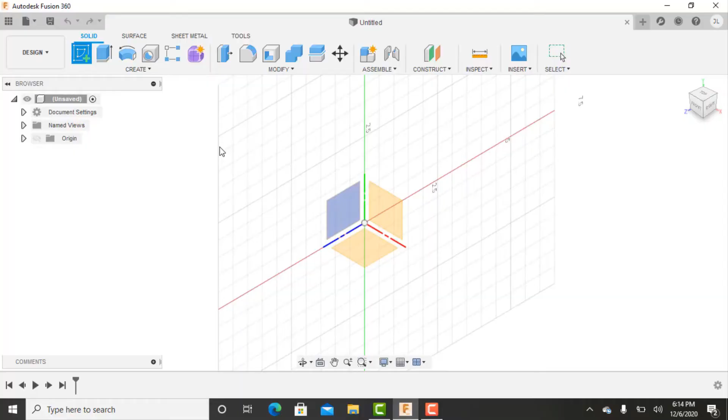In the CAD side of Fusion 360, we're going to start by making a sketch. We make a sketch, we select a plane, and then we can sketch a rectangle. We can then push D for dimension and throw some dimensions for where we think we want to be.

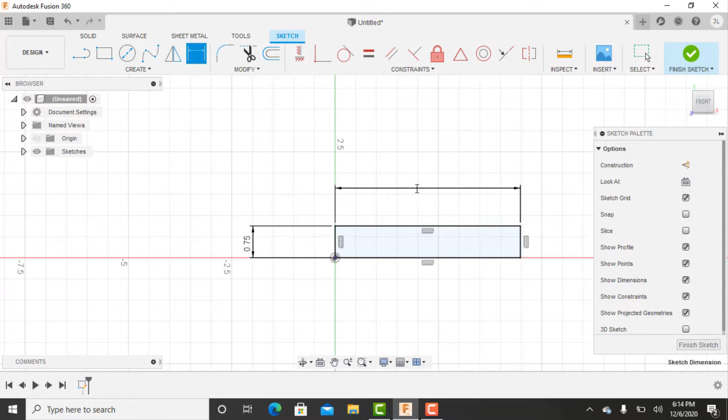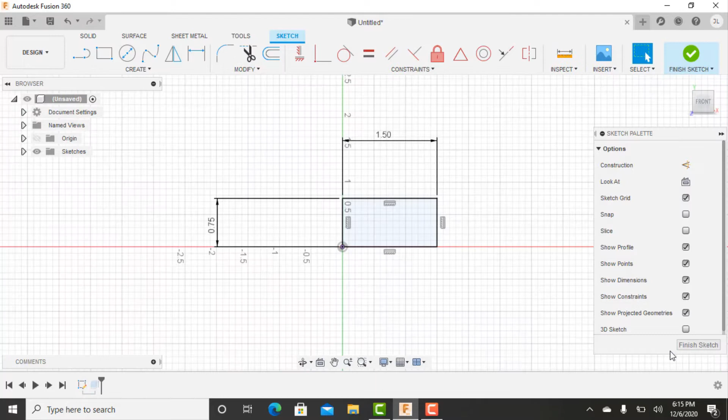The real value in CAD software is being able to get a very good visual. So no longer do we have to pull these numbers out of thin air without having any good representation of what they look like. We're able to put them on the screen and get a good visual for how they're going to work together. So after I had that sketch made, I pushed E for extrude, and then within the extrude feature, we're able to make that sketch three-dimensional. We gave it a dimension of 1/4 inch, and now we have a body.

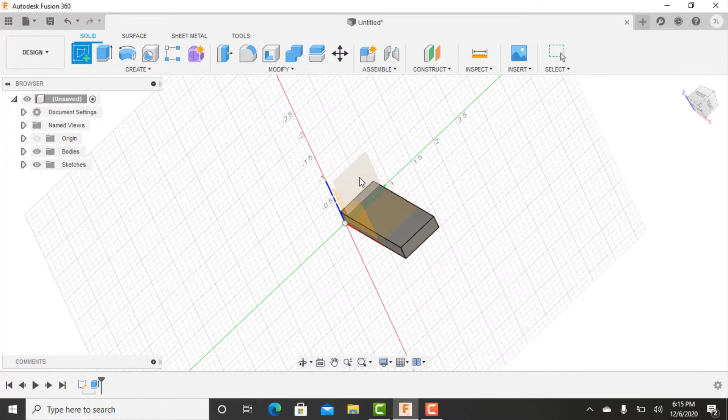So from there, we can add another sketch. We select a plane. We can select any of the construction planes, or we can select a surface on the model that we already have. So we can select this top surface and then draw another rectangle. E again for extrude, and then we can give this some three-dimensional geometry as well.

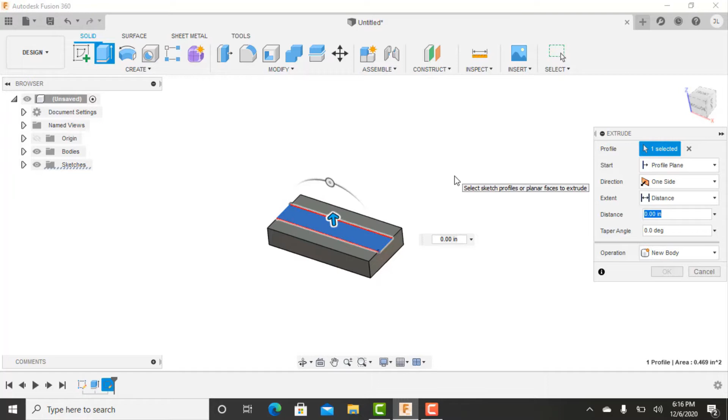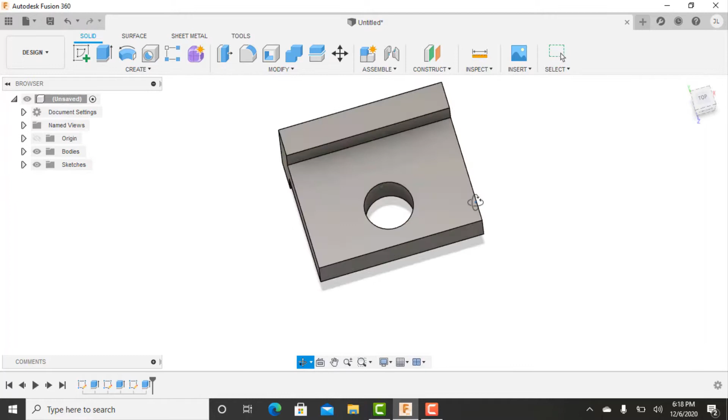So from there, we can create another sketch and create the hole we need. So we'll start by making a circle. Within extrude, we can either add to the model that we already have, or we can intersect the model and it will cut the body. So now we have a hole. Let's make that an 1/8 inch, and then we'll use a 1/4 inch end mill. So when we use it, it makes the radius that we're looking for. So we can also round these corners to make it look good.

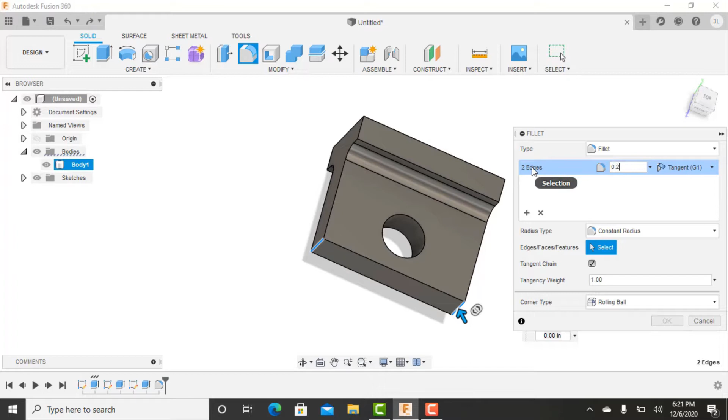There is the option to be able to add a fillet within Fusion, but I typically don't do that on the modeling side, and it makes life a little bit easier on the CAM side. There's a lot of different ways that we could go about making this. You could attack it from the top and then flip it over and attack it from this side. You can make it this way. So you're talking about having the raw material clamped in the machine and how you're going to machine it out.

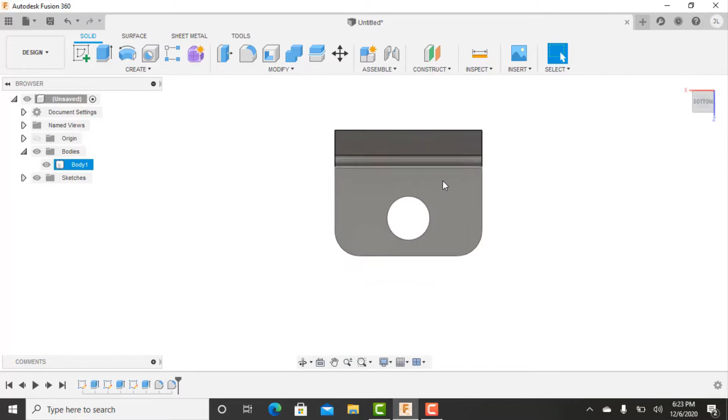Yes. So starting to think about more of the programming side now. Exactly how we're going to op this part out would be how it's referred to. What operations we're going to do first and how we're going to do them. From this top side, we can only reach so many features with a 3-axis machine. One option would be to machine this top face and then flip it over and machine this.

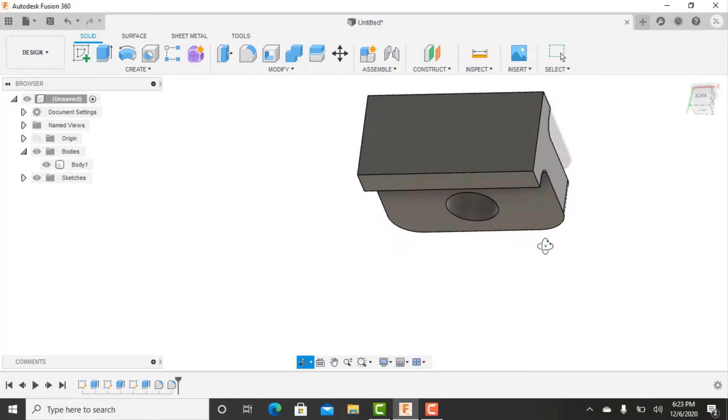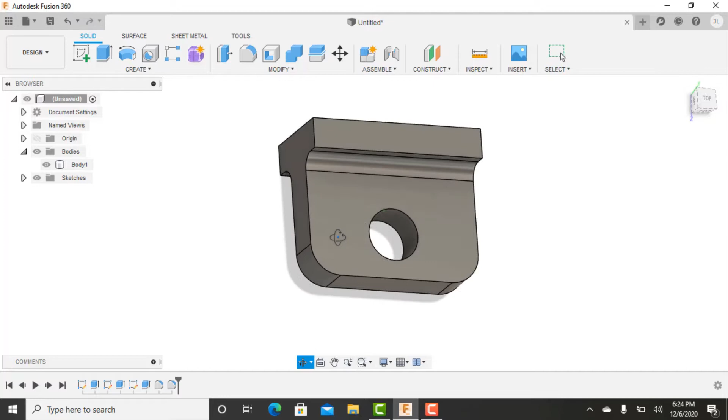Another option might be to machine this as the top of it at first, flip it over. You would have to clean off what's left in the bottom where you were holding it in a vise, and then set it on its side to drill a hole in it. There's a lot of different ways you could go about it. We'll probably be better off to do it this direction, where we'll machine as many features as we can from this top side, and then we'll flip it over and finish it up. And that way we're getting it done in 2 operations.

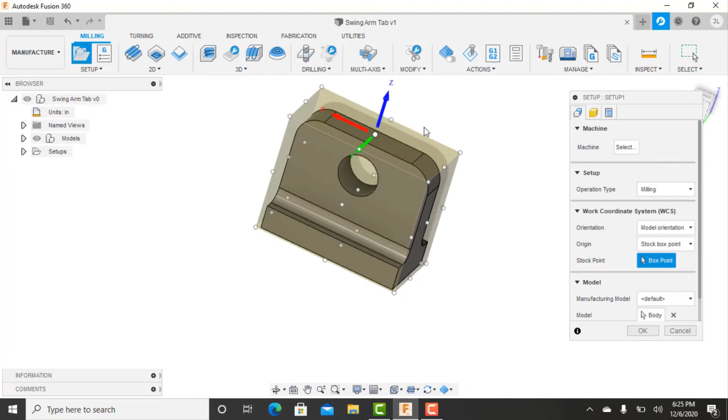We can jump over to Manufacture, which is what Fusion calls their CAM space. On the Manufacture side, the first thing we're going to do is create a setup. So we do so here. Here's where we're going to tell it the work coordinate system. So essentially tell it where the machine is referencing 0 from, and then what orientation we're going to set up this part. The default is model orientation, but that is not the way we want to do it. So we're going to select a Z and an X axis.

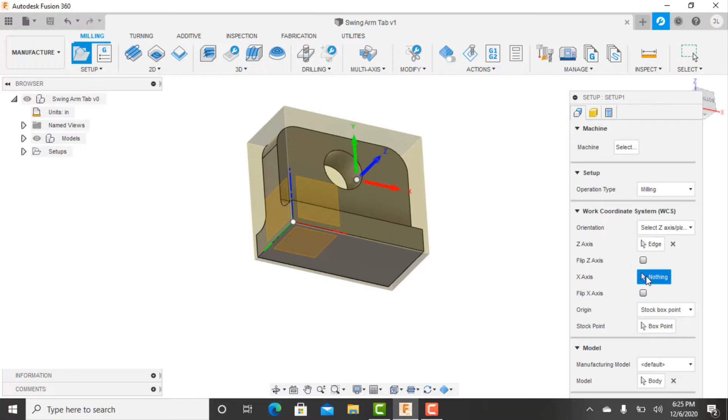So we can select any line on the part that would represent the Z, and then machine it this way. So we'll machine that. We'll set that as the x-axis, and then we can flip it to where it's where we want.

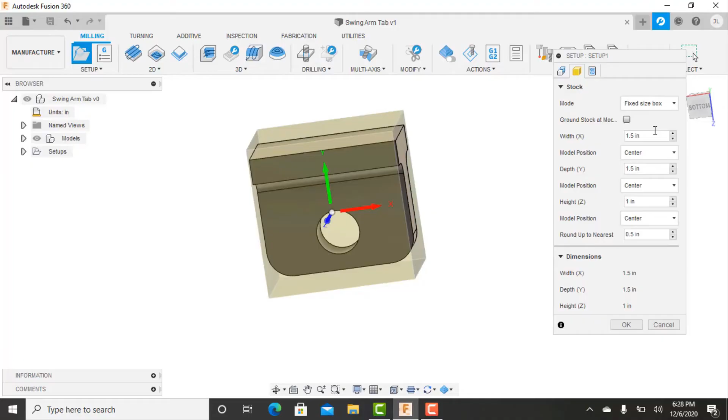And the next tab of the setup is where we can establish the stock size. So default is a relative size box. We'll start with a fixed size box. We'll just go ahead and cut this one time. So we'll make it 2.88 inches in the X direction. And then we can go ahead and cut it at 1.5 inches in the Y.

99% of the time, you want to try to orient your part to where the longer dimension of the stock is in the X-axis, so that way when you clamp against it, you have less material to bow. So if I was putting this whole chunk in a vise, I would want to program it to where I'm holding it like so, right. Just because holding it like this is going to give more room to bow.

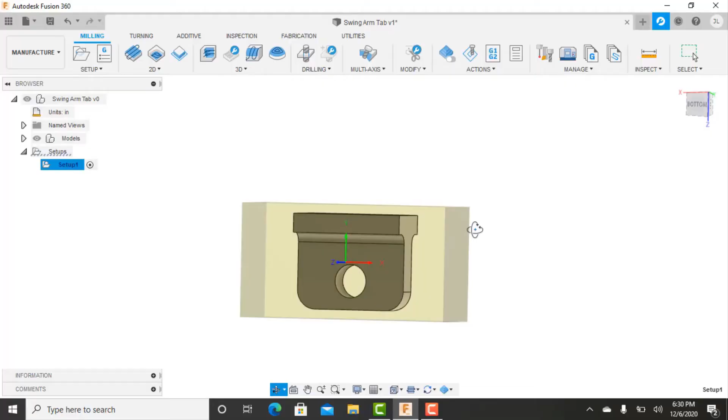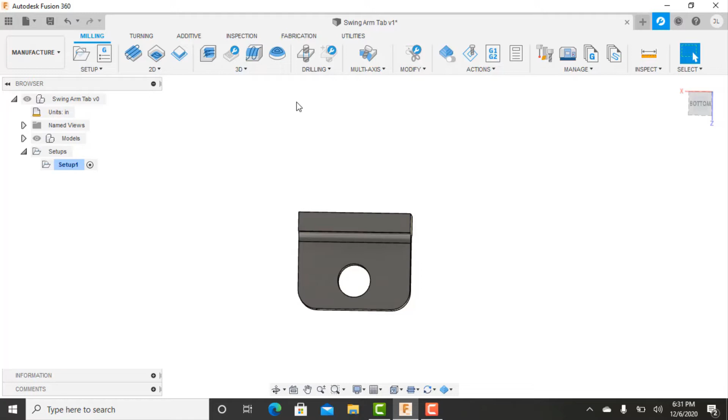Okay. So we need to start out with a roughing operation. Fusion 360 calls these adaptives. Here in our different toolpath options, we have 2D toolpaths and 3D toolpaths. A 2D toolpath is essentially Z coming to a position and then X and Y moving around in whatever shape it needs to contour your part. Whereas a 3D toolpath is for all three axes moving at the same time.

So we'll use 3D adaptive clearing, select that end mill, and then since we're working in aluminum, speeds and feeds are pretty forgiving. You have a lot of options for how you can input this. So we can just call it 8,000 RPM. In aluminum, your surface speed is really forgiving. Your feed per tooth or your feed rate needs to be reasonable. I can tell you with a lot of confidence that if we rough this part out at 4 thou per tooth, we're going to be doing just fine.

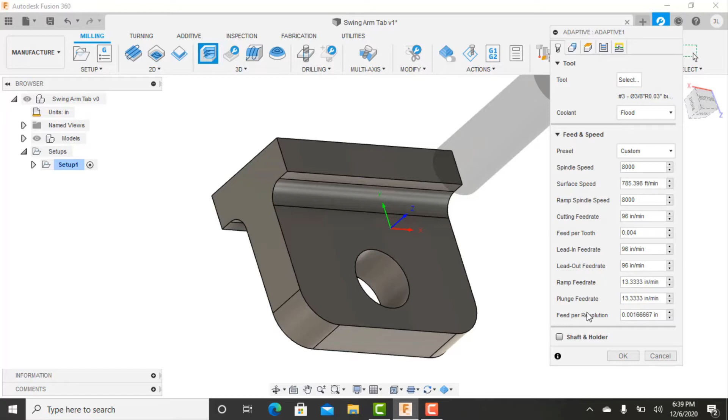Lead in, lead out, that's just coming into the cut, coming out. And then ramp and plunge are only really critical if you're actually cutting in the plunge or if you're going to be ramping into the material. So that would be like if you had a pocket and you need to get down in there. 3D adaptive is going to essentially look at your entire part. You can give it different boundaries. I don't think we need to right here. We should just be able to tell it stock contours, and then we'll set some heights on our height tab.

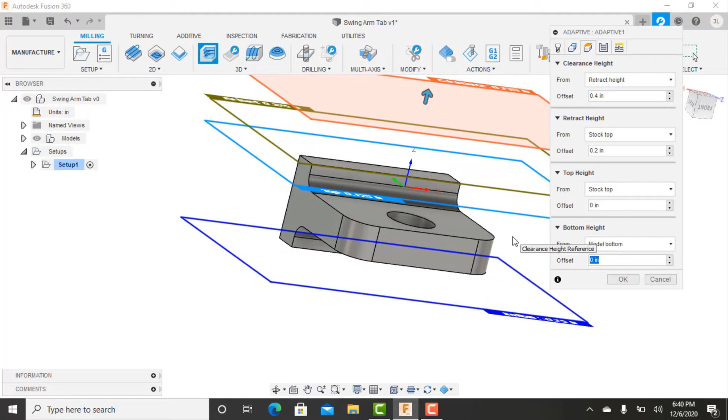Because we're roughing, we want to be able to come down and finish those walls. We want to drop our bottom height down below that. So we'll go 40 thousandths below for our roughing tool. Our optimal load here is very important. An adaptive strategy creates a toolpath to clear out an area and attempts to keep a constant radial load. General rule of thumb in aluminum, anywhere between 10% and 40% of your tool diameter is going to be pretty good. So we're using a 3/8 inch end mill.

So the maximum roughing step down is how much length of cut it's going to take in any given pass. We have a 1 inch length of cut end mill that we're doing this with, so we can go much larger than the 390 it was originally given. And then this fine step down is going to be how finely it increments. That'll be more clear once the toolpath generates. And I'm going to set that at 10 thousandths.

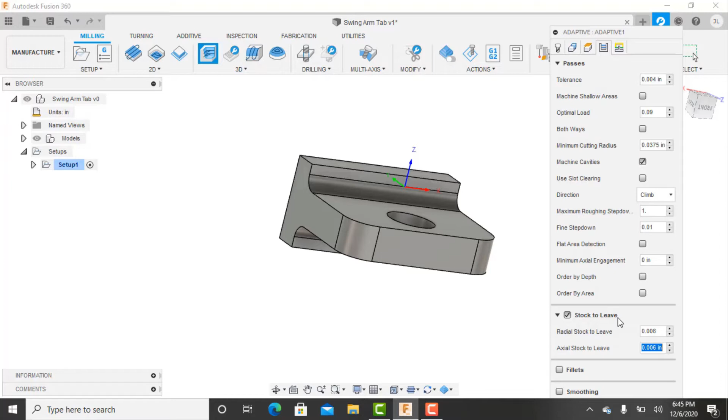And then for stock to leave, since this is a roughing operation, we're going to leave the part a little bit bigger than the final size. So that way a finishing end mill can come through at finishing speeds and feeds and make it look good. So we'll go 6 and 6. 3D adaptive is a very heavy computation, so it takes longer than others, but there is our toolpath.

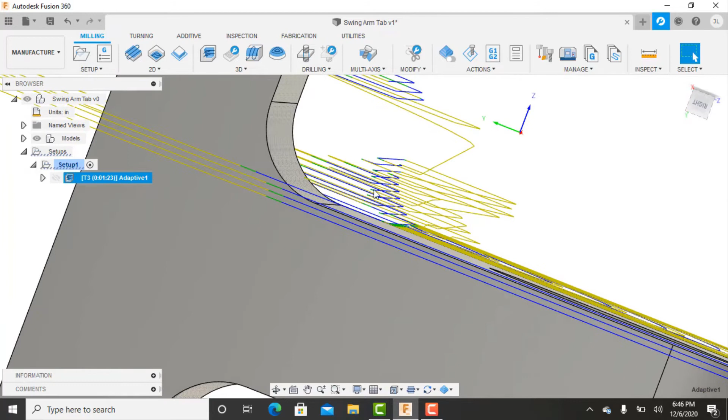So that fine step down we were talking about is how fine these steps are that it's incrementing along, say, a 3D contour. Like, what are some things you would look for on that toolpath that may be concerning?

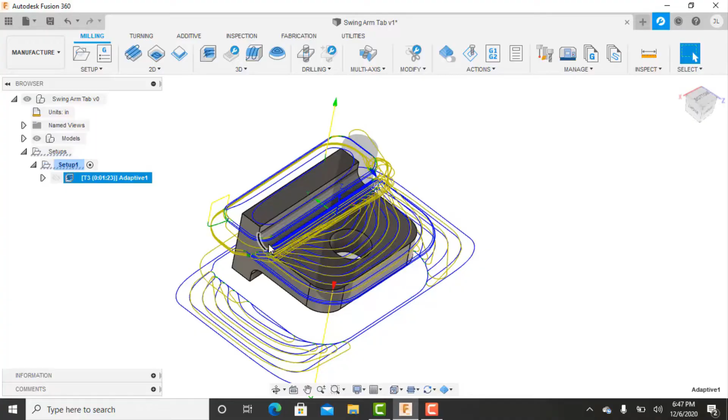Overall, a common mistake that I'll make is having your stock settings incorrect and or your heights tab incorrect. So you'll have it in your mind that my adaptive strategy, say, cleared off the top of my part, but sometimes it didn't. So then when the finishing end mill comes back, it's taking a 30 thou pass instead of a 6 thou pass.

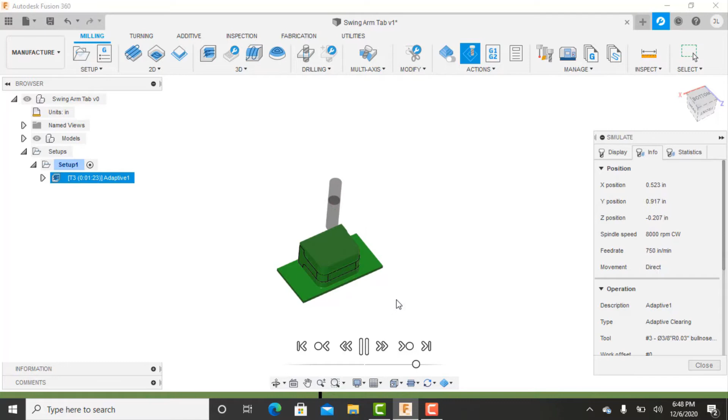So one thing I looked at here was just to make sure that that toolpath came around the top. That was the biggest thing, and just to make sure that there's not any overly redundant steps or anything like that. So I can run a simulation and it'll show you exactly what's going to happen. So that's where we are so far.

Looking at our different finishing strategies, I can pretty confidently say that 2D contour is the most popular. We can select 2D contour, and we do not want to use the same roughing end mill. So this we will run at 500 surface speed, and we'll give it a feed per tooth of 1 thou. So that's going to come out to 11.4 inches a minute.

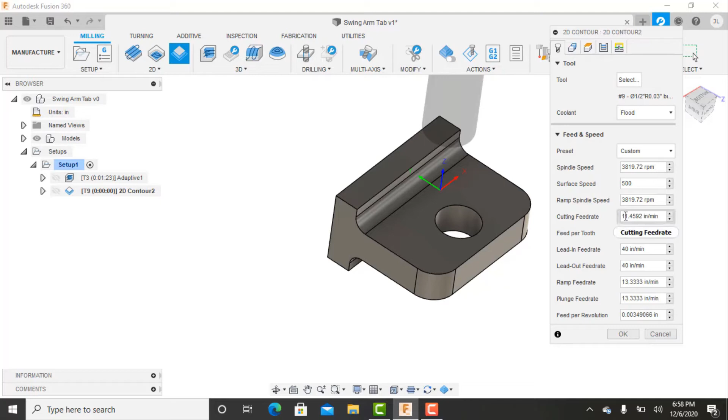And then for our contour selection, we can select the lines that represent the path we want the end mill to take. And as long as we give it a bottom height that will allow it to follow that shape, then it'll make it all one consistent toolpath.

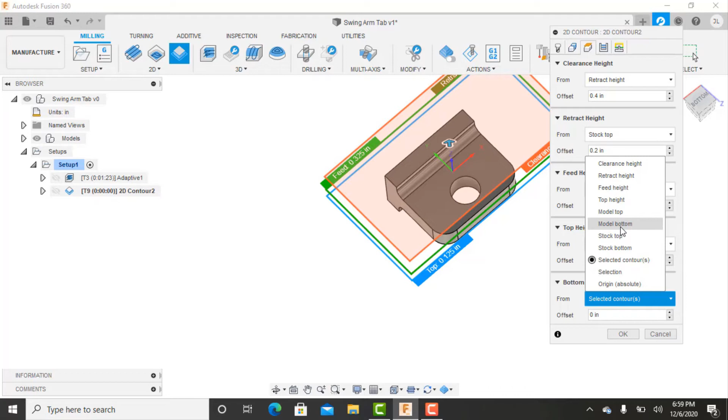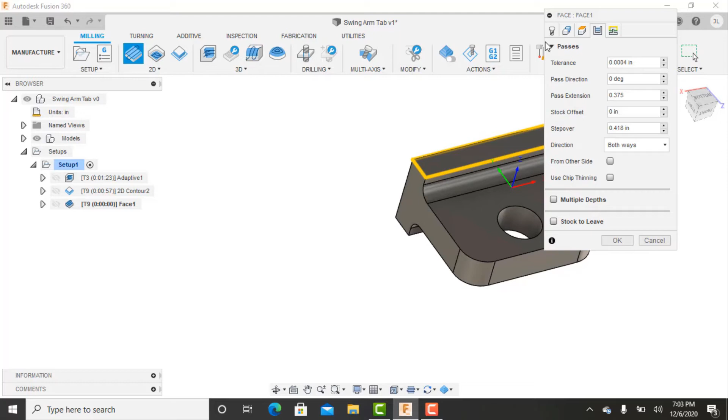We can use the same end mill, do a facing operation. We just want to clean off that top surface. We can even use the same speeds and feeds, but we will select that as our stock selection. Then the bottom height is going to come across right at the model top, and we will give it a pass extension of 375 just so it gets off the part. And now that will clean up the top.

So all we have left are the hole and chamfer left. So there's a couple different ways we can go about the hole. We could drill it to size, but typically drill bits don't leave the best surface finishes. We could just use an end mill and use a boring operation where it'll helix down through there. Or we could drill it undersized first and then come back and finish it with an end mill. There's a lot of different options.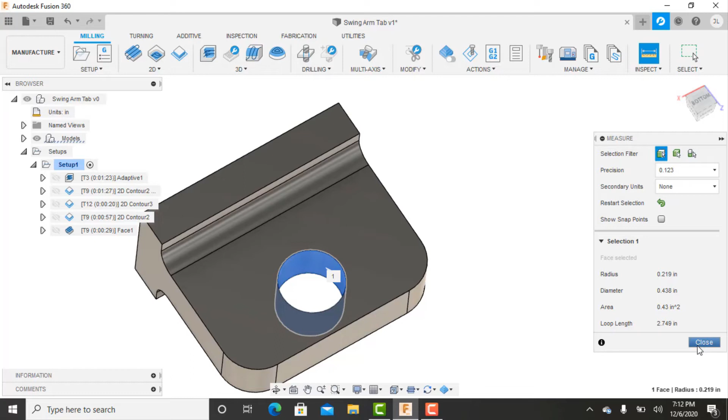If I was going to run 1,000 of these, I would set up a drill bit a little bit smaller than that hole diameter and then drill it and then come in with an end mill just to finish that wall to give it a better surface finish. But since we're only making a couple of these, we'll just do it all with an end mill.

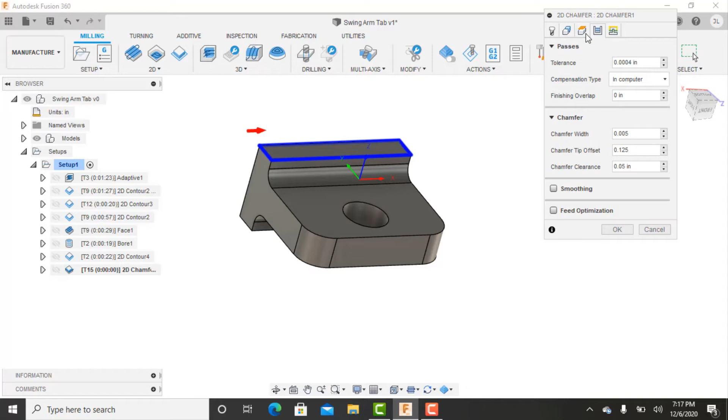And then here is where we can tell it we want to do a finish pass. So that is going to leave stock as it helixes down in there, so it'll make a smaller helix, and then come back and just do essentially a 2D contour to finish it. So now the chamfer tool will go about an 1/8 inch, 125 should work well. And actually we'll see here that might be too much.

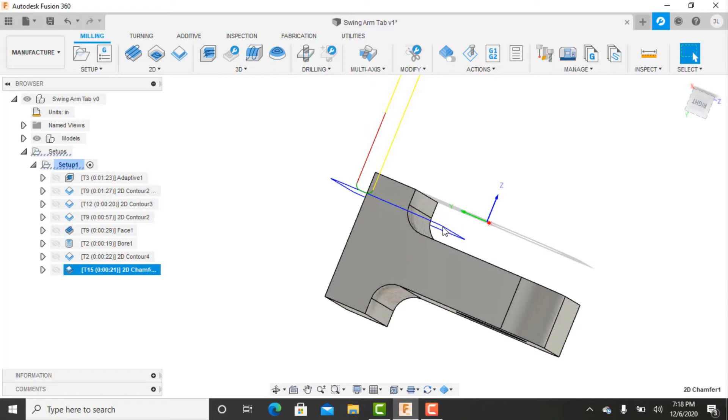So we'll select a corner as an entry position, and we'll give it a little horizontal lead-in radius just to make it a nice smooth transition into the cut. So nope, it is not too much. So this is an example where if you put too large of a chamfer tip offset, it would not machine the chamfer on this edge because this flange is in the way. And Fusion's pretty good about not ruining your part with your chamfer tool. So that's op 1, should make a good part.

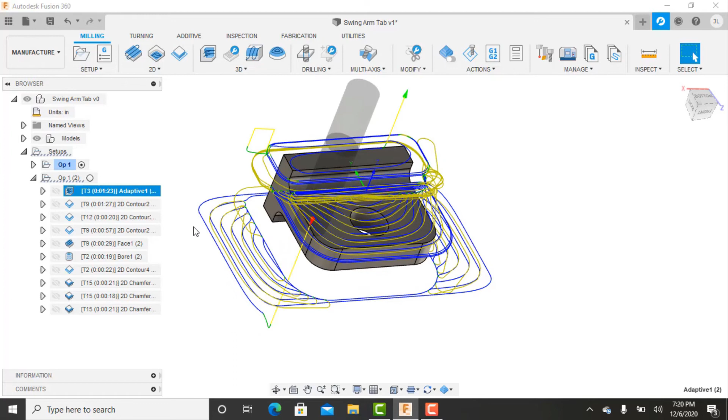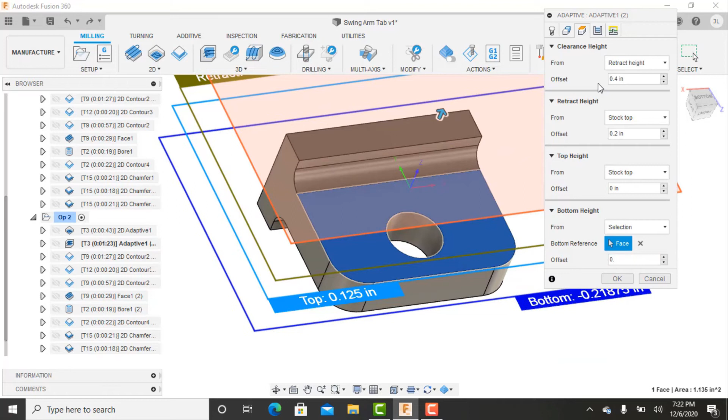Op 2 is going to be very, very similar, just with a few less operations. The big thing to remember is we're not trying to clear all the material now, we're just trying to clear essentially a hat off the top. So changing the setups, it does that. Control G is generate. We still will need to clear out this area. So what we can do is change our bottom height to represent that. And it should just clear. If anything, it might clear too much.

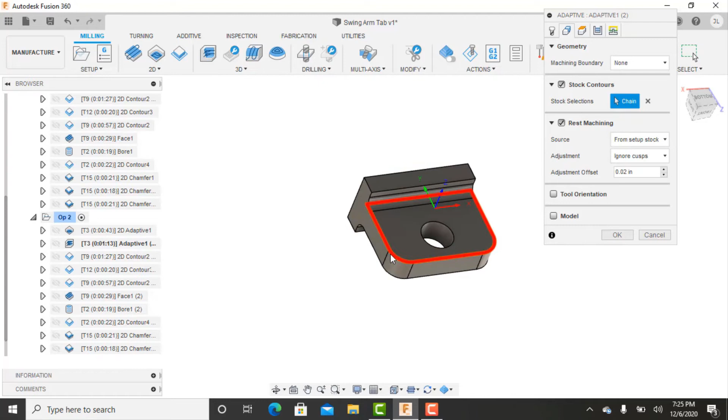We changed our height, and now we need to change our stock contour to let it know what area it needs to clear. So we can select that geometry, hit OK, and it should generate a toolpath. Here we go. So that is what we want.

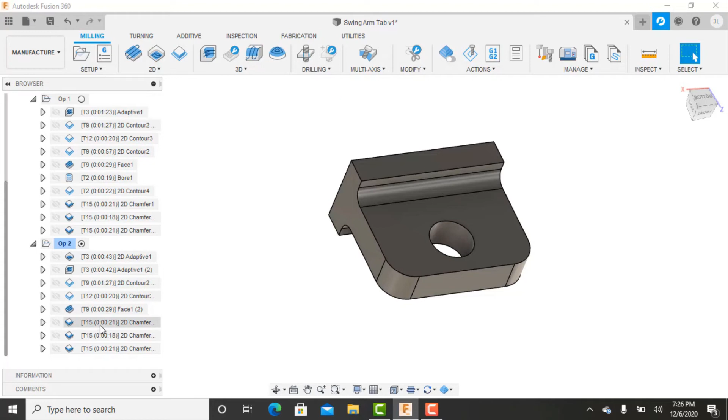We'll finish the floor, finish that vertical wall. We do not need to finish the outside again. Finish the top, and then we do not need to worry about that bore. We will chamfer the top, chamfer the hole, chamfer the outside edge. Should make a good part. Cool. This machine has a probe and is going to help us line up the second operation.

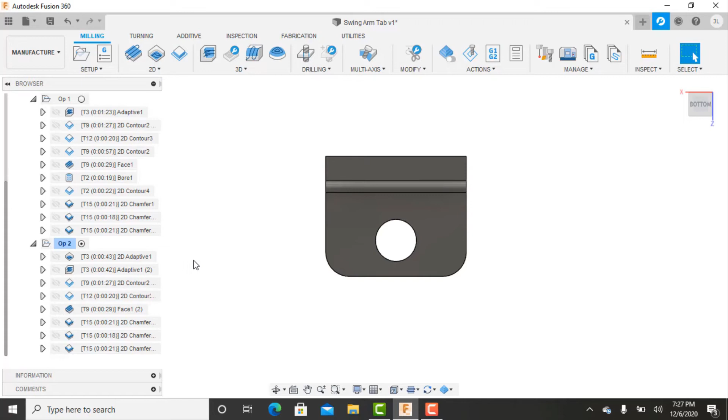We'll use it to set the work coordinate system for op 1 as well, but we don't need to worry too much about making it perfect, running from part to part to part, because everything will be relative to the machine's movement, not to where the stock is placed. We can go over here to the inspection tab, probe work coordinate system. We'll have to tell it that we have a probe.

It is a 6mm probe. What's that in American? Did you say millimeter? I know, it hurt my heart.

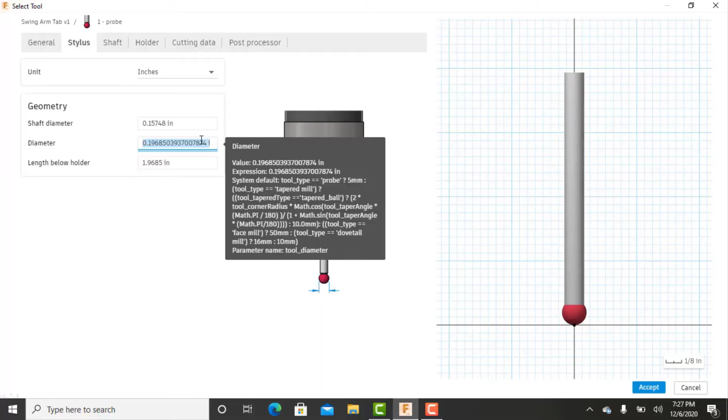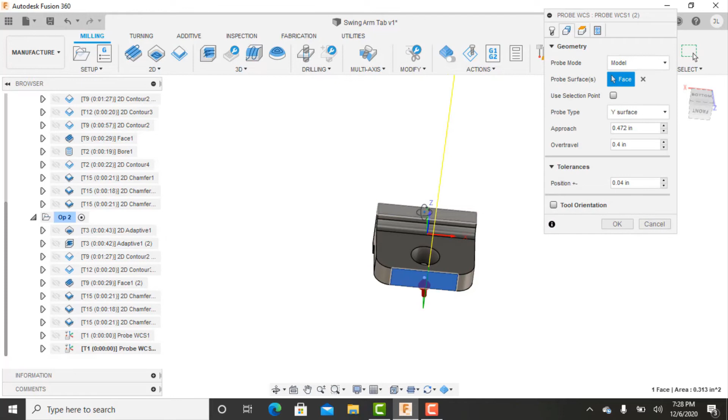That is .236. So, and then it is tool 1. Select that. So we can tell it to probe X, like so. We'll hit duplicate and tell it to probe Y. So here it looks like it's probing into space, because it would be if the part was finished. But we're going to do this right after that initial 2D adaptive runs.

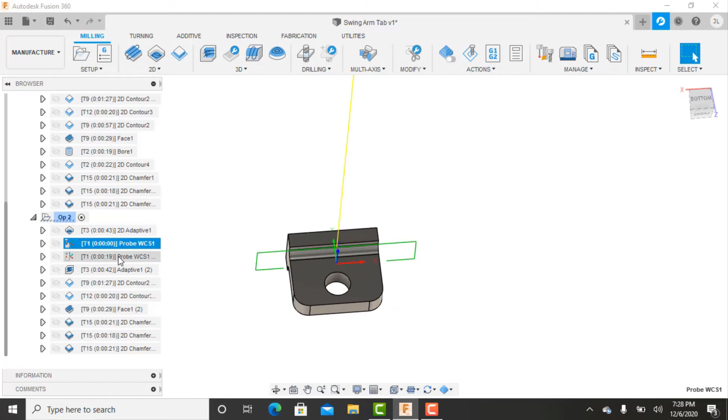So when we put the part in the vise, the first thing it's going to do is clear the top off. Then these finished walls will be exposed, and then we can bring the probe in to touch off the part. But since this area has not been cleared out yet, there will still be material there for it to probe. So then it will come down once it precisely knows where the part is and conduct the rest.

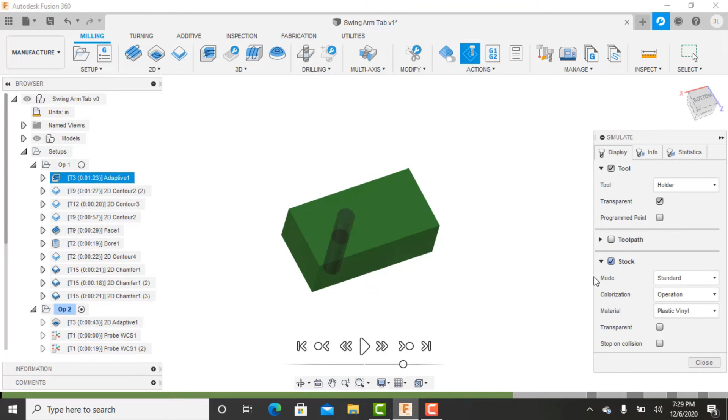From here, we select our operation. We can do a final simulation to see that we're making a good part. The final button here says go to the end of the toolpath, and that shows us what we're going to end up with. And then you hide the model itself. So just completely calculated from the stock, that's what you're going to end up with.

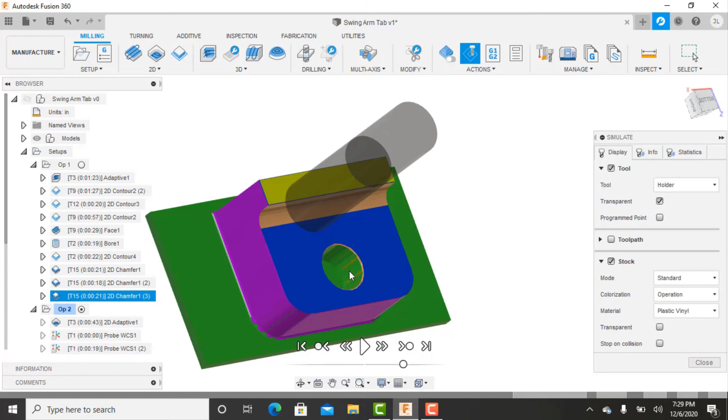I do this for almost every single part that I run, because it gives you a visual of what the toolpaths are actually creating, not what you hope they're creating. This is a good way, and the most common place to catch mistakes. We need to post this program. So that's where the software is going to actually create a G and M code. Select that setup, we'll hit post, and then the software needs a post processor to do that.

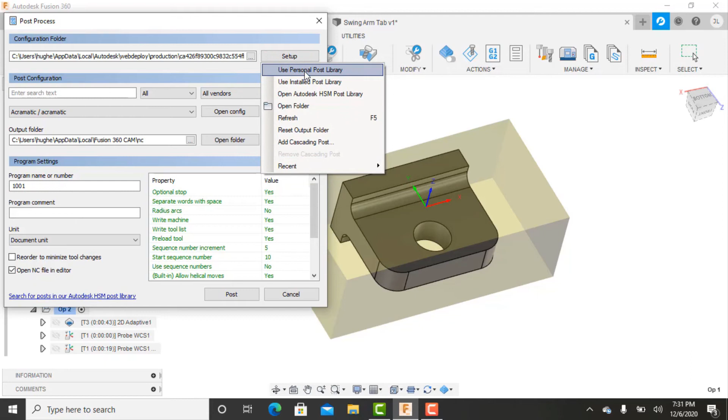Right now, the post processors that we need are on the flash drive. We're going to be running this on our Hurco, so we need the Hurco post processor, and then these settings all default back. So now we can hit post, it goes to the flash drive, we'll hit save. So let's fire up the machine. So we just fired up the machine. The only thing we've done so far is flip the switch on the back.

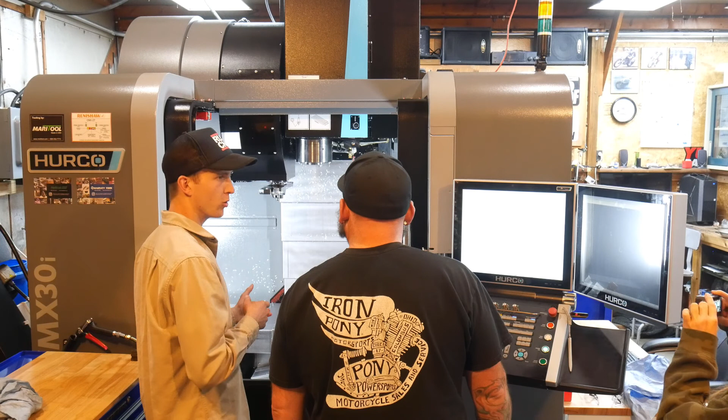Now, this machine does not have a vise on the table. We're running wheels, we don't use vises for those. We need to throw a vise up there to be able to make these little parts. And then we'll blow it off with an air gun. We should put glasses on before we do that. All right, camera person, bring your glasses.

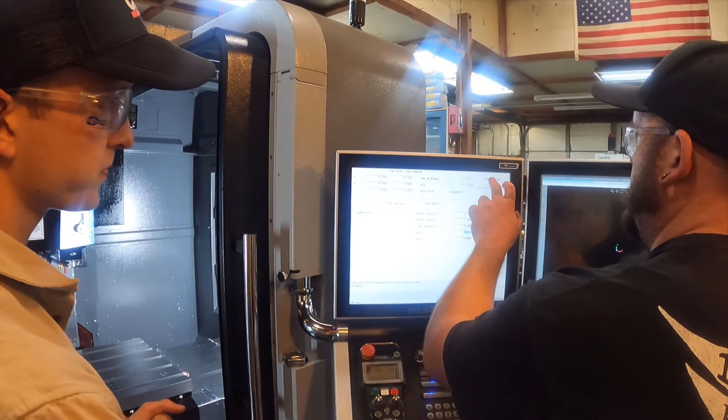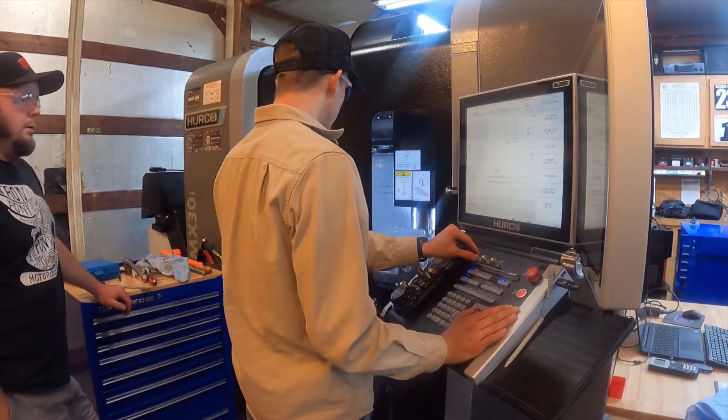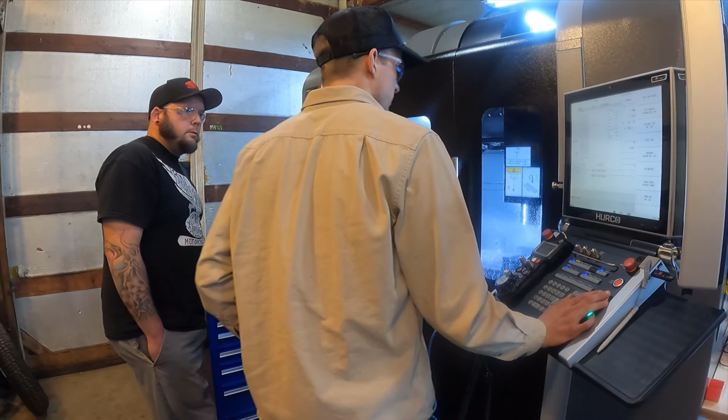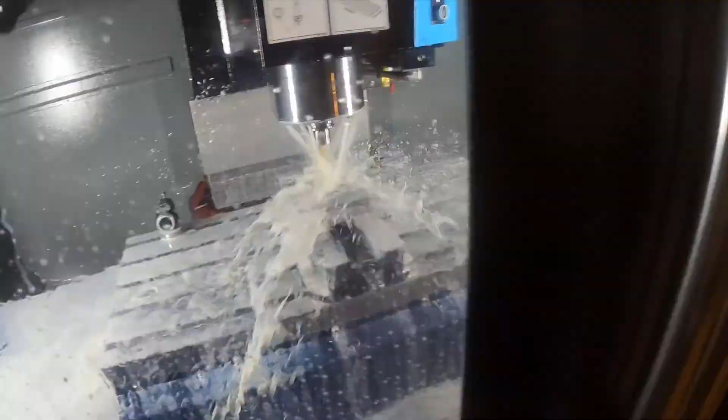So now our work coordinate system is set. We're ready to start the program. Now the machine knows exactly where the material is and where the program is going to go. Oh yeah, we're good. So good. Cool. There's the first side done.

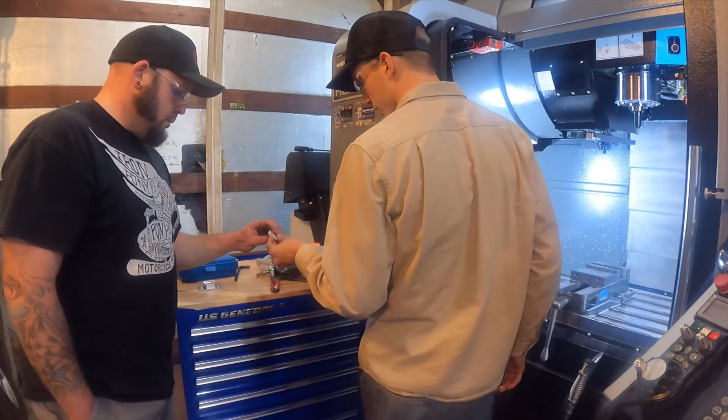So here we have our finished parts. I know I learned a lot during this process, and in case you're wondering, these are intended to be welded onto the bottom side of a swing arm so that a motorcycle rear stand can go through these holes and lift the back end of the motorcycle up.